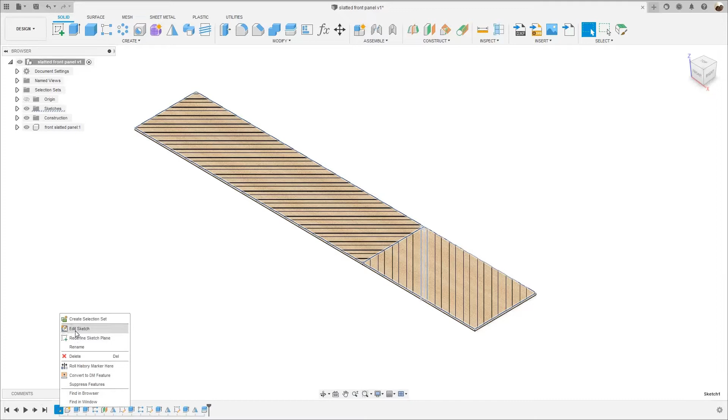The first thing I did is create a sketch. You see the timeline, I created a sketch, right click, edit sketch. And then I created this rectangle, that's the size of the front panel. The overall width is 135 inches.

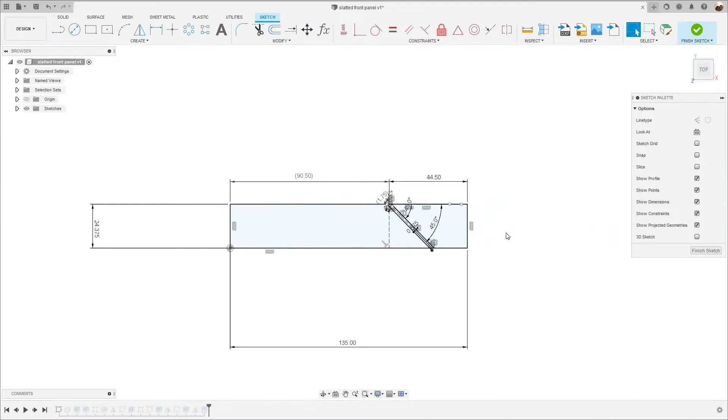The height is 24 and 3/8. I have one dimension here on the right, which is 44 and a half, that's the width of one panel, which is the one on the right, and the one on the left is 90 and a half.

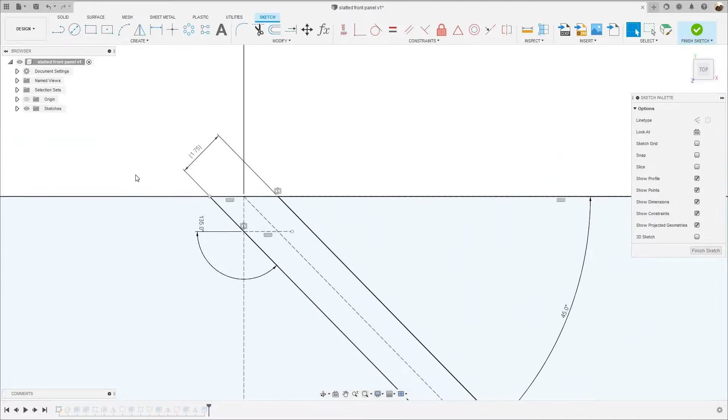Then I created a sketch right here, and this is just the groove, at an angle of 45 degrees, and the width of that groove is 1 3/4. That's the sketch.

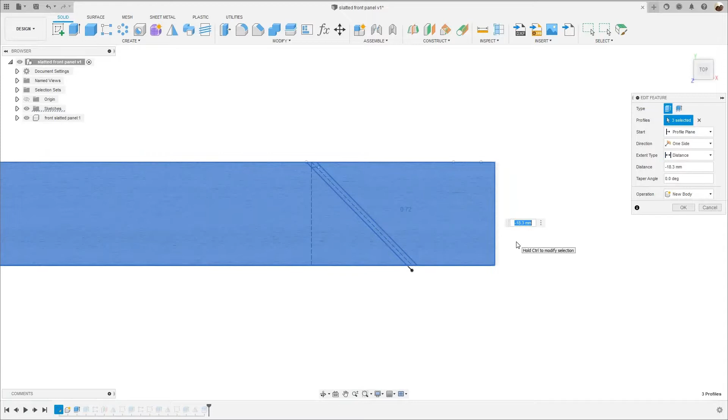So I'm going to finish sketch, and then extrude it. I selected the entire profile, and typed minus 18.3 millimeters because that's the thickness of the white oak.

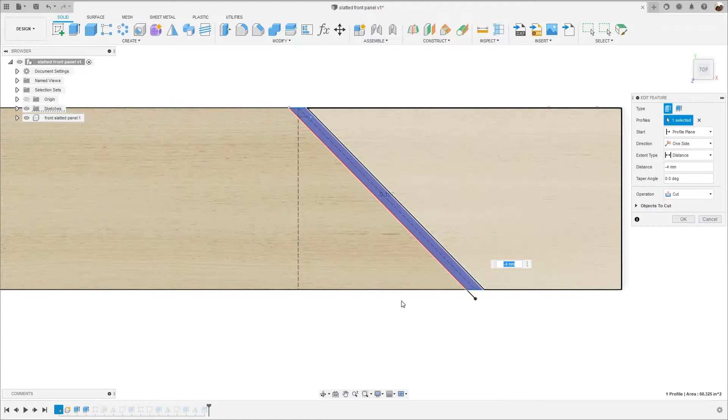I'm going to hit cancel, and then I created that front panel, that 3D model. Then I extruded that sketch of the groove, and went down minus 4 millimeters because that's the depth of the groove, which is 0.156 inches.

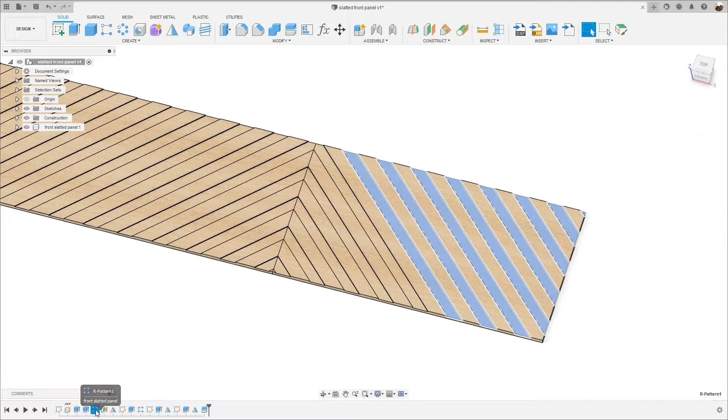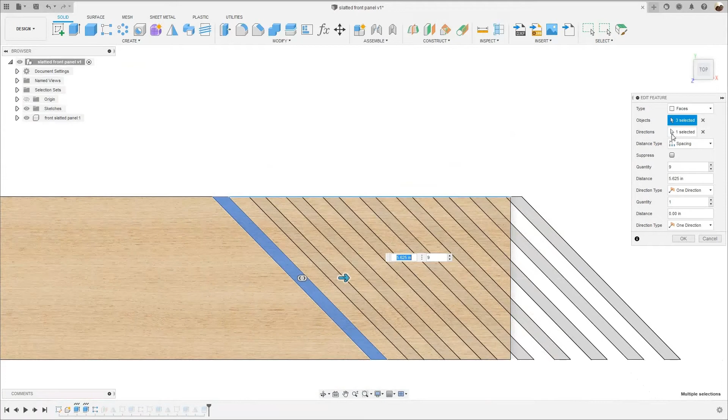I'm going to hit cancel, and then I did a rectangular pattern. I selected the three faces of that groove, and the direction is this edge right here, highlighted in blue. The distance type is set to spacing, quantity is 9, the distance is 5 and 5/8.

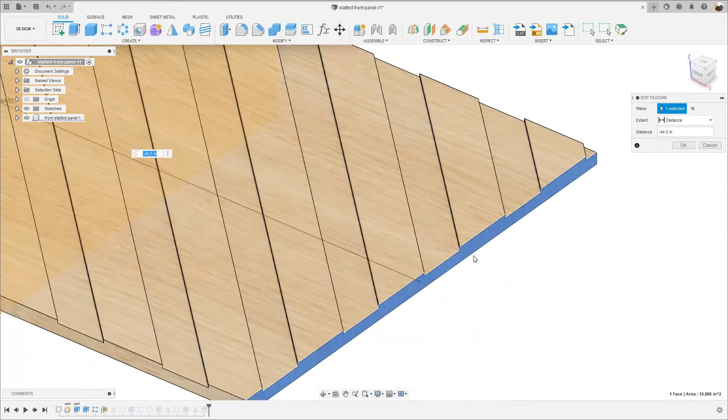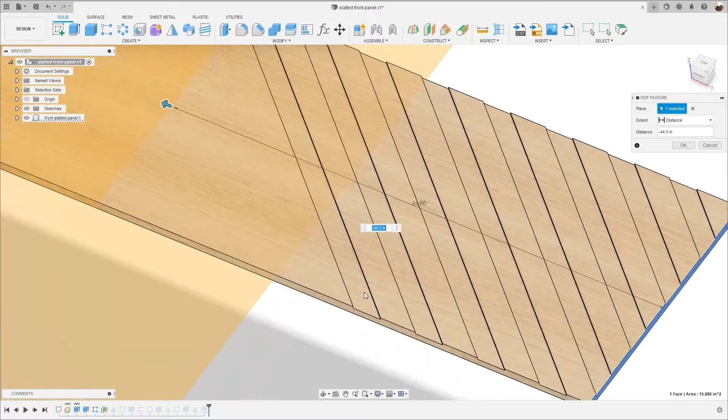Then you cancel, and then I created a plane. This is an offset plane. I selected this face right here, and gave it a distance of 44 and a half because that's the width of the panel on the right. So I can use this plane to mirror these grooves onto the other panel.

I'm going to hit cancel, and then I did a mirror of this groove, and my mirror plane was the offset plane.

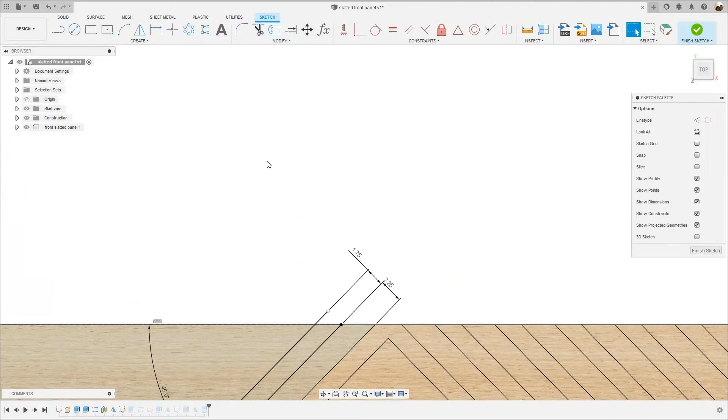And I did a sketch on the other panel. Then I created a sketch right here, this is the space between each groove, which is 2 1/4, and I have the sketch of that groove 1 3/4, and I have the angle right here.

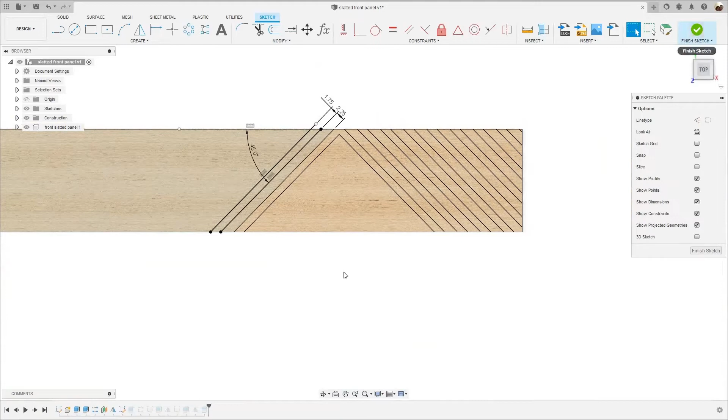Then I extruded that sketch of the groove, and it was minus 4 millimeters, just like the other one.

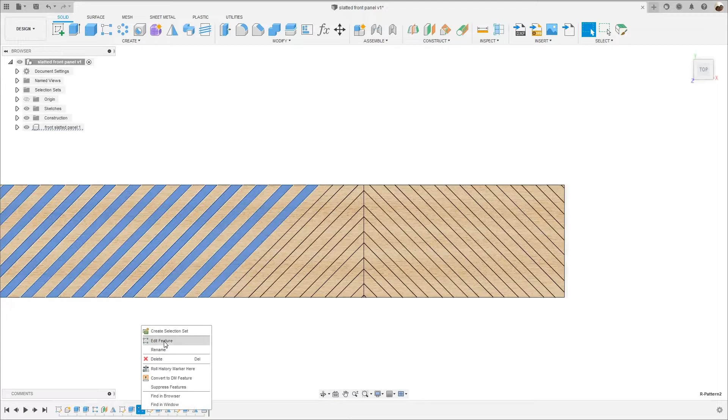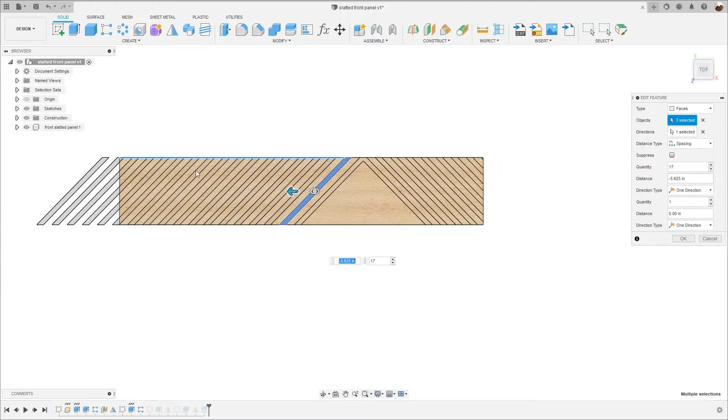I'm going to hit cancel, and then I did a rectangular pattern of that groove going to the left. This is the direction, this edge highlighted in blue. Distance type was spacing just like the other one, quantity was 17, and the distance was the same as the other one, 5 and 5/8.

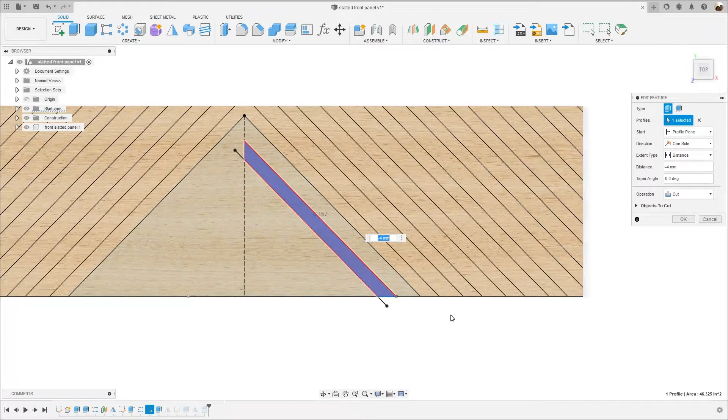Then I created a sketch on the right panel, right here. I'm going to finish the sketch, and then extruded that sketch minus 4 millimeters.

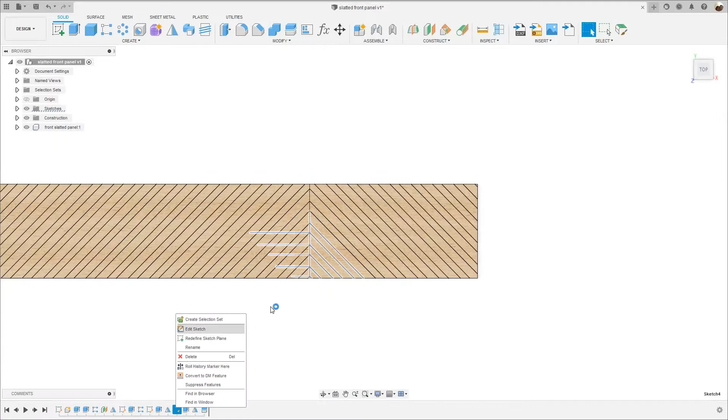Hit cancel, and I mirrored that groove onto the other side, onto the panel on the left. Then I created another sketch on the right panel, and I started creating the remaining grooves right here, in the spacing.

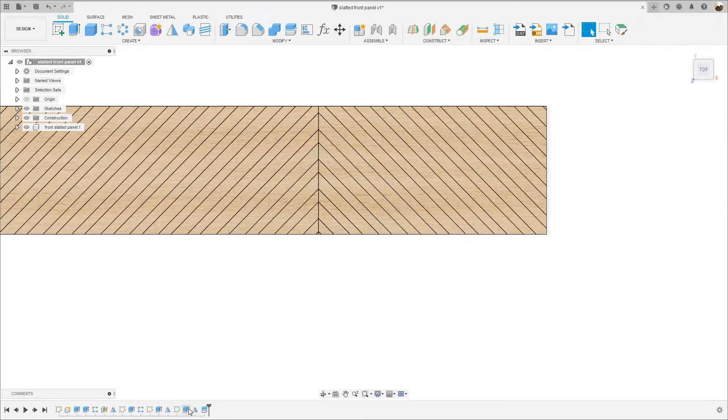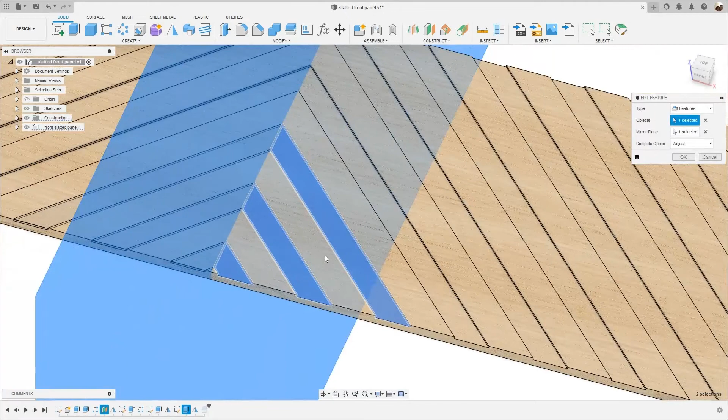Then I extruded the three grooves, minus 4 millimeters. Hit cancel, and then I mirrored those three grooves.

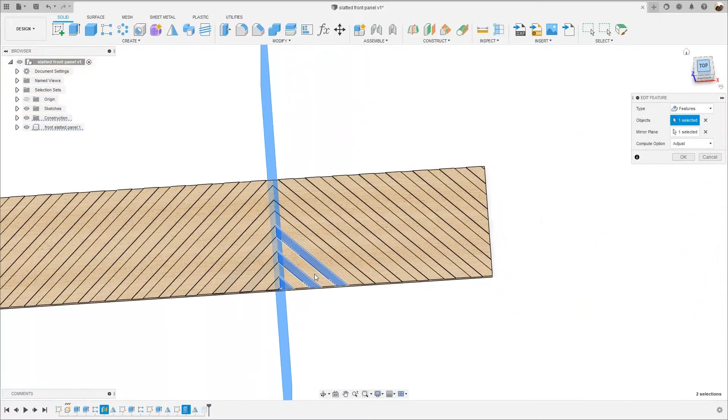Cancel. So I did a sketch, then extruded it, and then mirrored. I mirrored the grooves onto the left panel, and that mirror plane was the offset plane.

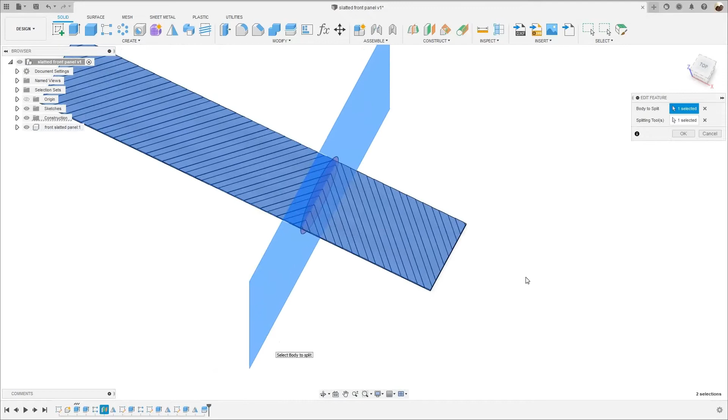I hit cancel. And the last thing that I did is split body. Right click, edit feature. So the body to split is the whole 3D model, and the splitting tool is the offset plane, and that gave me two bodies.

I'm going to go to the component where it says front slatted panel. I'm going to click on the arrow to drop it down, and click on this arrow next to the bodies, and I got the right panel and the left panel. See that?

So that's how I modeled this slatted front panel. I know there are other ways to do this faster. This is my first time modeling something like this in Fusion 360, so I know when I do another one like this, I'm going to use fewer steps.

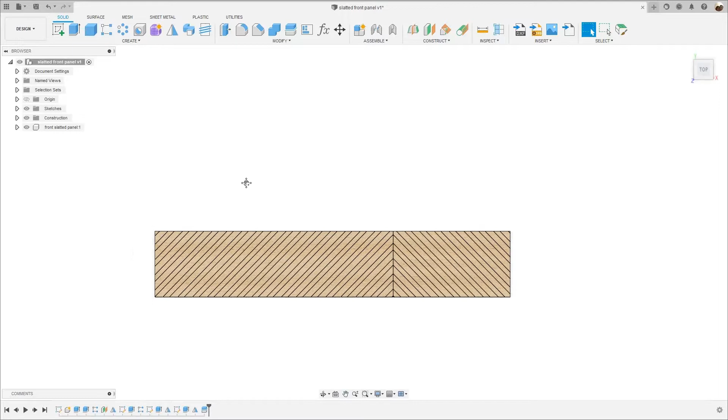So let's go to the manufacturing workspace, and I'm going to show you how I program this front panel.

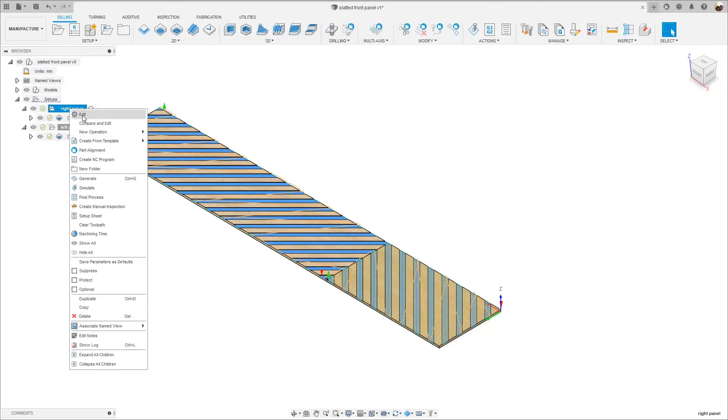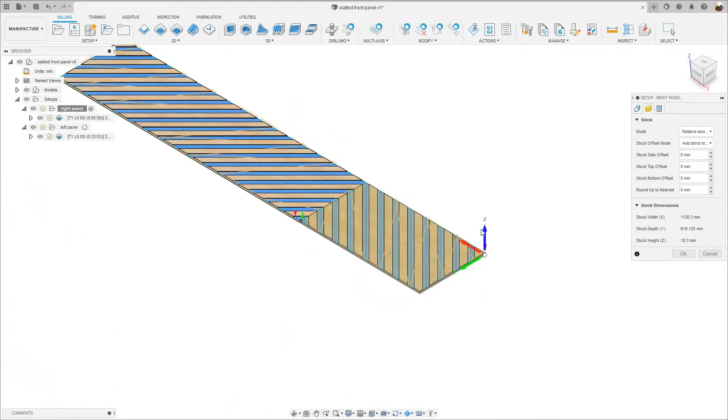Under stock, I didn't add any stock. Post process tab, this is where I named the program: right panel, program comment, 3/8 2 flute downcut. That's the tool that I used.

I didn't have any downcut tool bigger than 3/8 at that time, so that's the only downcut tool that I had, the 3/8. So I'm going to hit cancel.

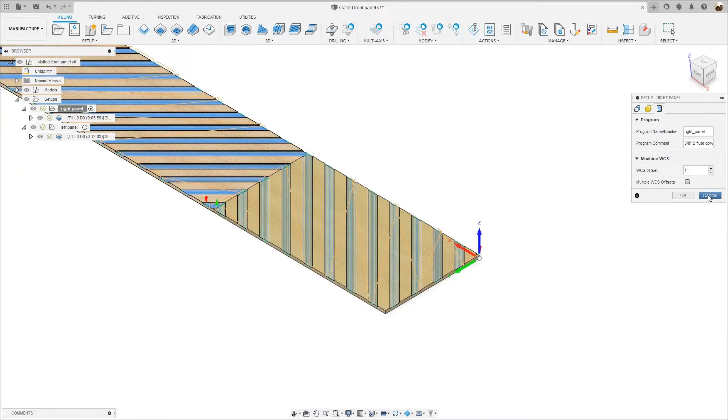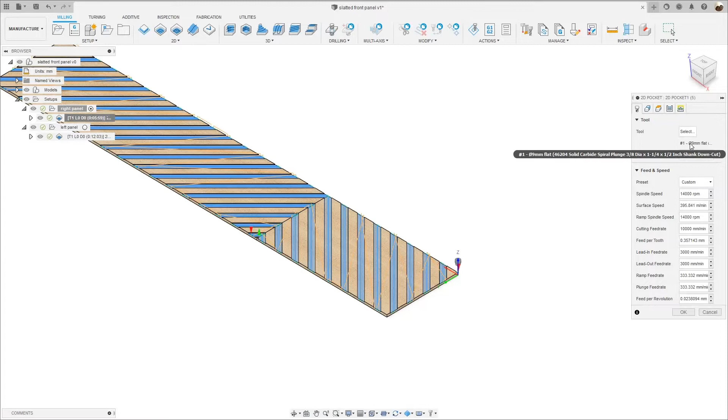That's the right panel setup, and I use a 2D pocket. Spindle speed 14,000 RPM, cutting feed rate 10 meters per minute. It's the 3/8 two flute down cut, see that? It's actually 9 millimeters. So that's the tool that I use for this job.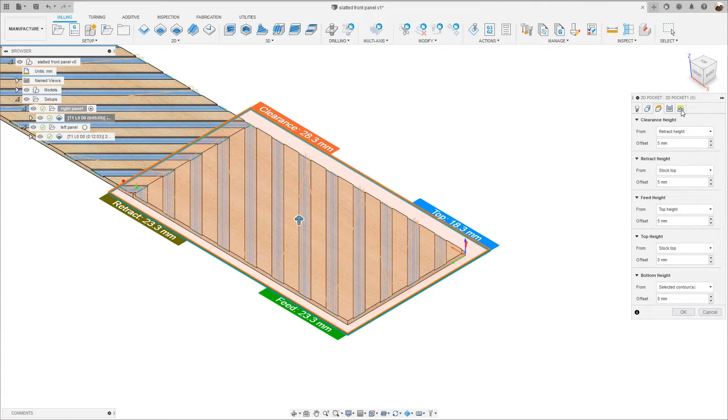Under geometry, I selected all these faces. Extension mode set to parallel. On the height tab, I didn't make any changes here. Under passes, I have preserve order checked and both ways checked. Maximum step over is 7 millimeters.

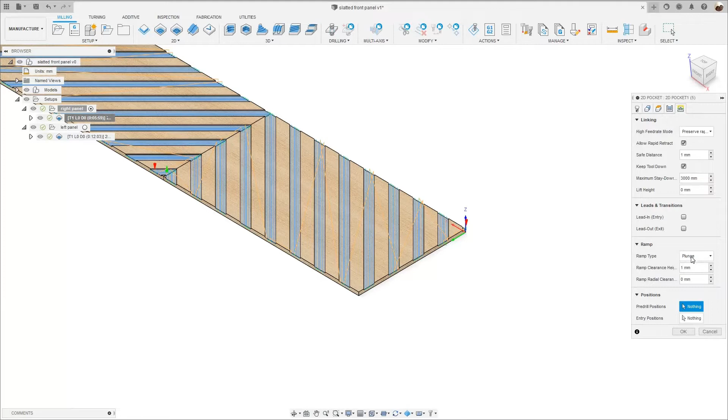And that's it under passes. Under linking tab, I have keep tool down checked. Maximum stay down is 3,000 millimeters, and ramp type is set to plunge. I'm going to hit cancel and simulate that toolpath. Right click, simulate.

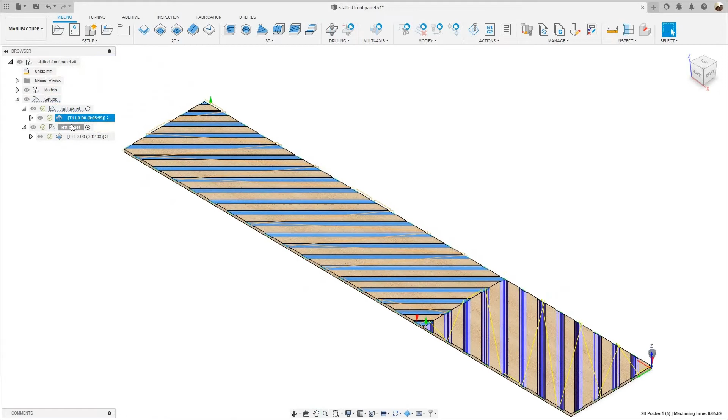That's a 2D pocket. Let's go to the next setup, which is the left panel setup. Right click, edit. Under model, I selected this model. And stock, no material, edit.

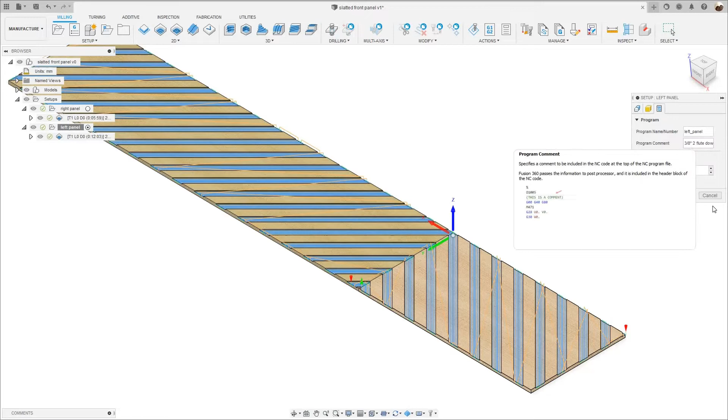Under post process, this is the program name, left panel, program comments, same as the right panel setup. So I'm gonna hit cancel, and I use a 2D pocket. This time I bumped up the spindle speed to 16,000 RPM. The cutting feed rate remained the same as the right panel setup.

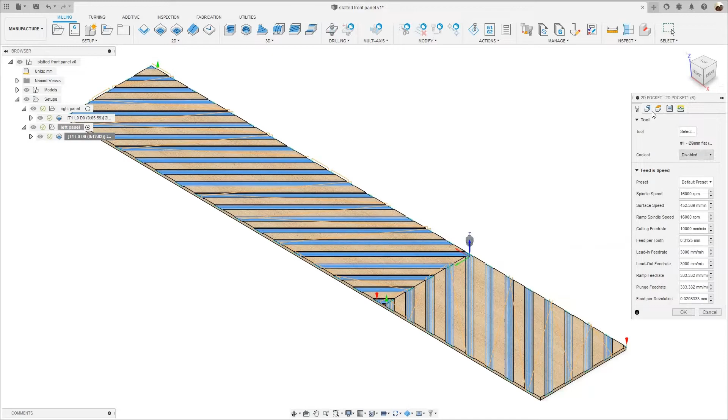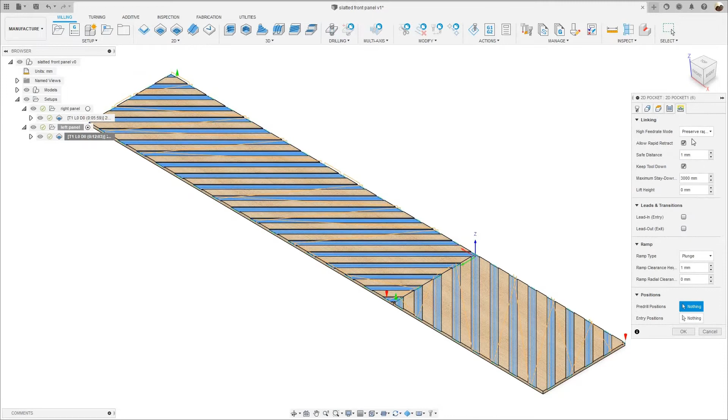Geometry, I got 21 chains selected, or 21 faces. Under heights, I'm gonna skip that, I didn't make any changes here. Under passes, it's the same as the right panel setup. Linking tab, it's the same as the right panel setup. So I'm gonna hit cancel.

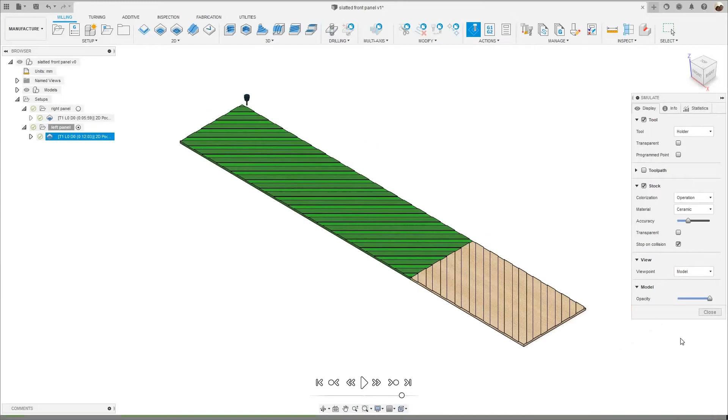I'm gonna simulate the left panel. Simulate. Okay, that's the left panel setup. Looks good, and I'm gonna post process these two programs.

I'm gonna open them up in Woodwop 5.0. That's the one that I have at work and at home. Let's post process right panel first. Right click, post process.

If your box looks different than mine, you don't have this, you don't have anything like this, you're gonna have to update the Woodwop post processor. There's a new update that came out about 16 weeks ago. So you're gonna have to go to the Autodesk website and update your Woodwop post processor, and then you're gonna have these properties like this, in order.

But before you update to the newest version of the post processor, don't overwrite it. Just create a copy of your old post processor, and download the new post processor, just in case something goes wrong. So always keep a copy of the previous post processor before you update to the new one. That's my advice to you guys.

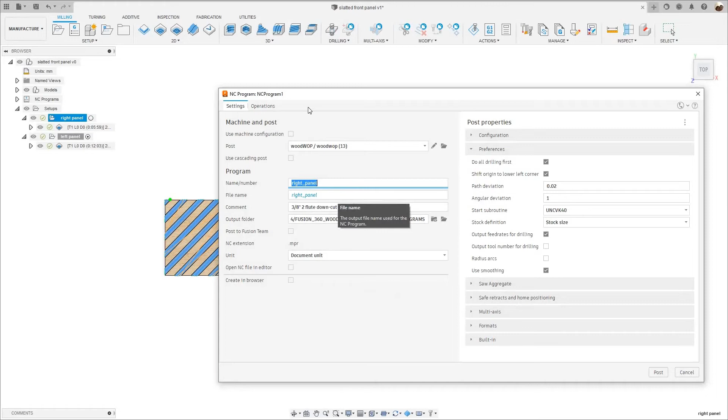So I'm gonna post process the right panel program. Click post. It has been posted. And then I'm gonna post process the left panel program. Right click, post process.

Let's go to woodWOP 5.0. I'm gonna go to File, Open. Go to the folder, Test Programs folder. I'm gonna open up the left panel program. Here it is.

Tool number is gonna be 1 in my case because the machine doesn't have a tool changer, which really sucks. If you have a machine that doesn't have a tool changer, you got to make sure that the tool number is set to 1. Every single tool that you have on your Fusion 360 library, make sure it's set to tool number 1, if you don't have a tool changer.

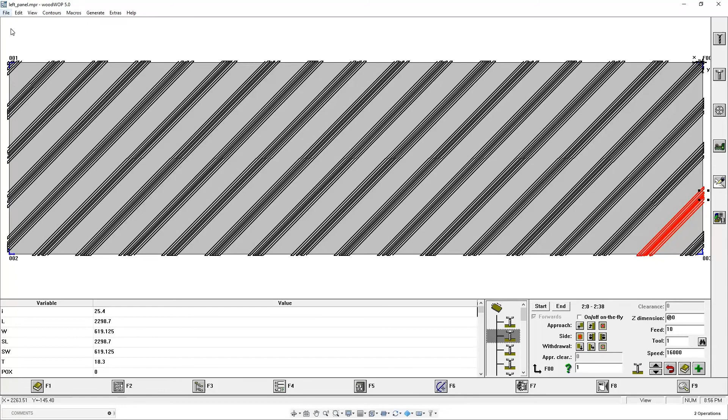That's the left panel program. Let's go open up the second program, the right panel program. And there it is.

Still all the routing macros. There's the comment macro. This is really helpful if you're programming jobs in the office and you have an operator running the machine for you, and the operator is not really familiar with CNC. So this is the comment.

It tells the operator which tool to use to run this job, if the machine does not have a tool changer. If the machine has a tool changer, you don't have to write this comment here, 3/8, 2 flute down cut, you can just write right panel is the small panel, white oak material.